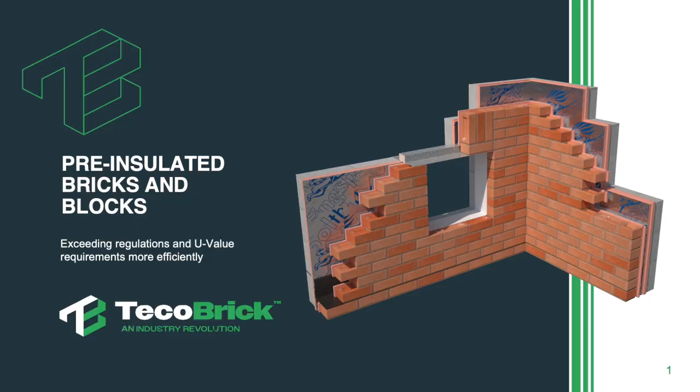So, who are Tecobrick? Tecobrick is an innovative, new construction company. Founded by Terry Wilcox, we are focused on product solutions that deliver high-performance, regulation-compliant constructions whilst maximizing labor and material efficiencies.

Our cavity wall products can be custom designed to meet your specific project requirements in terms of performance and aesthetics. Tecobrick is in partnership with Kingspan, the world's leading insulation manufacturer. Our systems use Kingspan Kooltherm K108, ensuring efficient cavity wall solutions across the board.

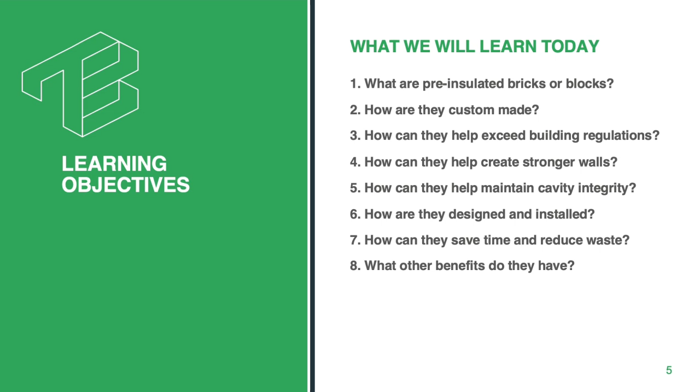Here are our learning objectives for today: What are pre-insulated bricks or blocks? How are they custom-made? How can they help exceed building regulations? How can they help create stronger walls? How can they help maintain cavity integrity? How are they designed and installed? How can they save time and reduce waste, and what other benefits do they have?

Insulation is precision cut to fit the brick or block exactly, and rebated on all four sides to ensure a seamless interlock with units above, below, and to the sides. This maintains insulation integrity and U values throughout.

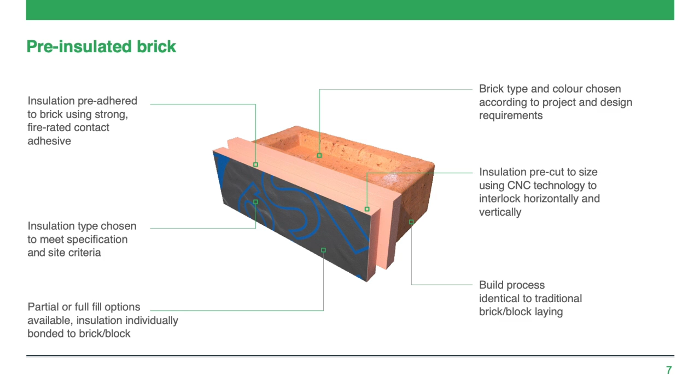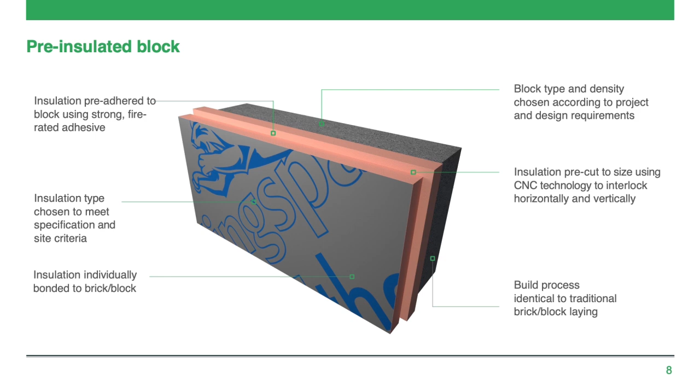Brick type and color can again be specified to suit the project. As we will see, these benefits are complemented by the fact that all installation is the same as for normal bricks or blocks. As with brick units, a range of block types and insulation thicknesses can be chosen to suit performance requirements. Partial fill or full fill cavities are easily achievable.

Let's take a look at how this particular cavity wall system has been designed to suit the house builder's needs. The system is available on a range of brick types, textures, and colors. This includes clay bricks, facing bricks, common bricks, engineering bricks, fire bricks, and concrete bricks.

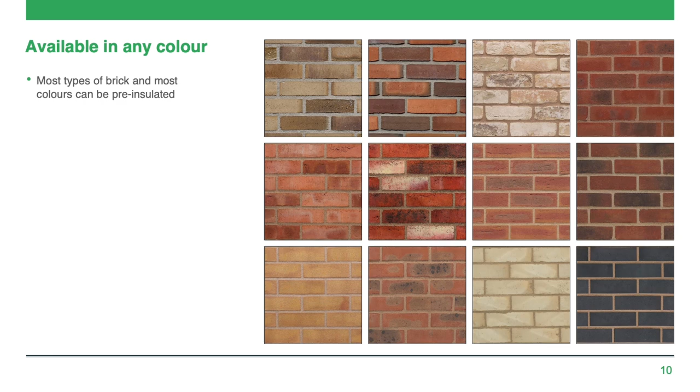Brick insulation thickness can vary from 30 to 40 mm, depending on whether you require a partial fill or fully filled system. Block types can be anything from thermalite blocks to concrete blocks, medium or high density. Insulation thicknesses can range from 50 to 60 mm, dependent on whether a partial or fully filled system is to be installed.

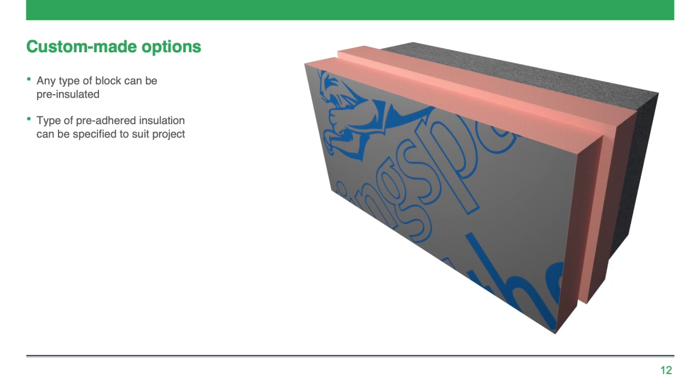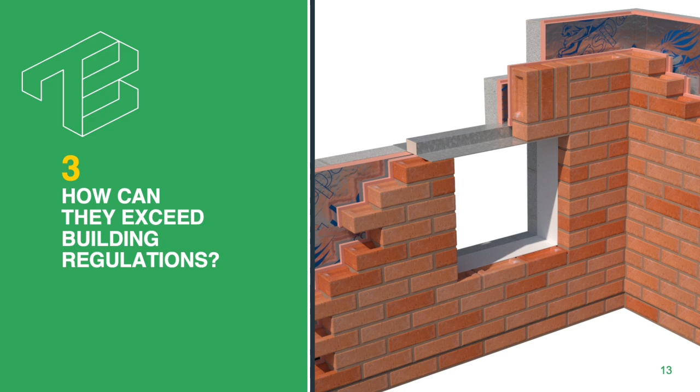Now we'll look at how these pre-insulated units can help exceed building regulations and U-value requirements. Please note that this system has been independently tested by Elmhurst Energy, a UK domestic energy assessor, DEA. Tecobrick is currently being assessed for certification by the BBA, and approval is expected in the coming months. Full reports are available for download at the end of this presentation.

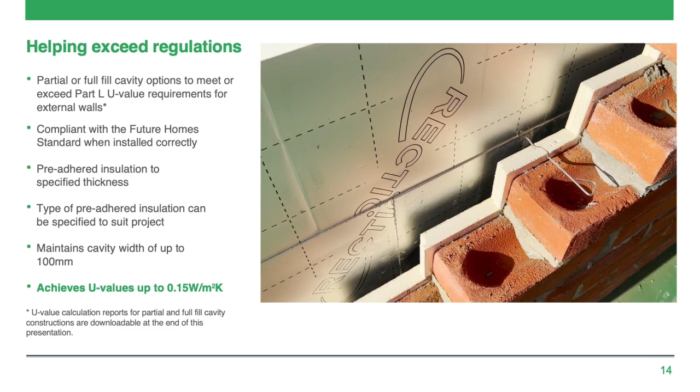Insulation thicknesses can be selected to best suit project requirements, achieving U values of up to 0.15 W per square meter K. Full fill or partial fill cavities can be easily achieved. Precision cut, pre-adhered insulation guarantees accurate cavity widths and ensures clear cavities. U-value calculation reports can be downloaded at the end of this presentation.

Insulation shown in this clip is for illustration purposes only. Tecobrick systems now exclusively use Kingspan Kooltherm K108 insulation.

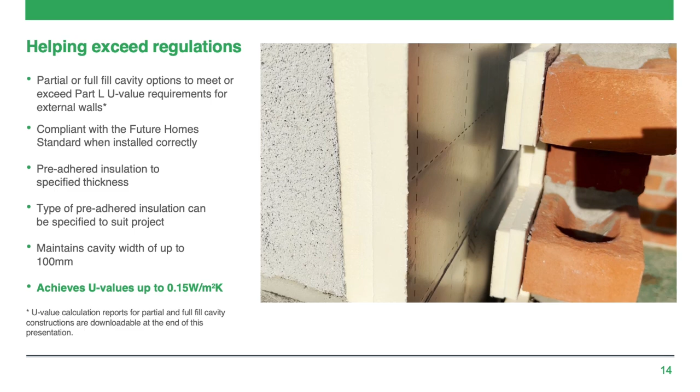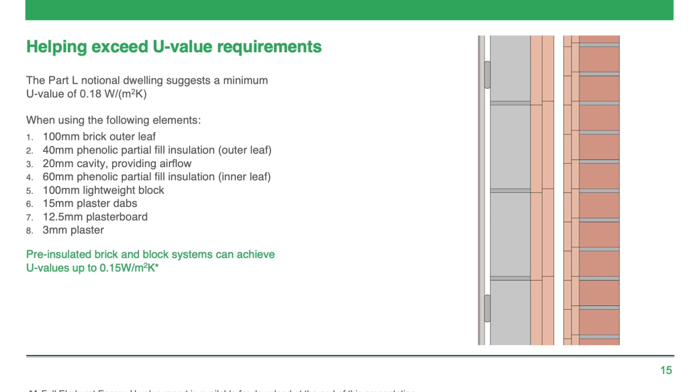This slide shows a section through a typical partial fill cavity wall. Independent testing shows that the pre-insulated brick and block systems can achieve U values of 0.15 Wm2K, exceeding the Part L requirements of 0.18 Wm2K. A copy of the independent report is available for download at the end of this presentation.

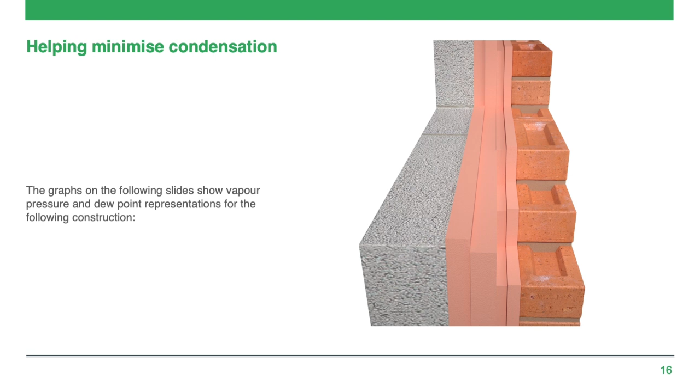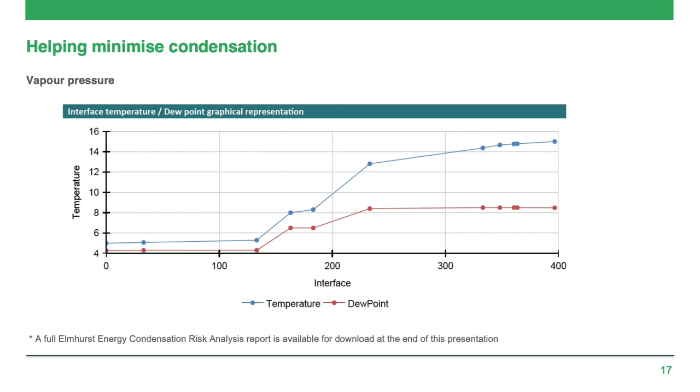As we can see, the temperature in blue remains above the dew point level at all times, ensuring that the dew point, and therefore condensation, is not triggered within the cavity. This slide shows the graph for a fully filled cavity. This means that cold spots are eliminated, and that the cavity wall is 100% damp and waterproof top to toe.

Clean, clear cavities maintain thermal performance and help ensure fire safety. Condensation risk analyses for partial and full fill cavity constructions are downloadable at the end of this presentation.

The insulation used in this system has a Euro class rating of F, under System 4 AVCP. Please note that there are potential restrictions placed upon this product which vary dependent on building type, height, construction and location. The adhesive is EN.

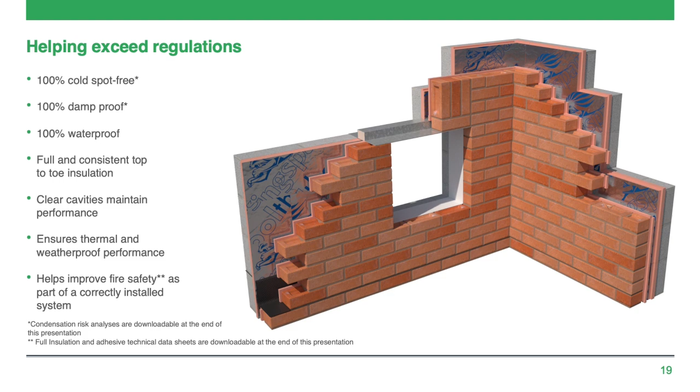13501 A2 S1D0 fire rated and is UK and EU IMO approved. Full technical data sheets covering the insulation and adhesive used in this system are also downloadable at the end of this presentation.

Traditionally insulated cavities can become clogged with mortar, loose insulation, and other debris. This can compromise their performance, allowing damp to transfer through internally and increasing fire risk.

Tecobricks and blocks help prevent these problems from arising and maintain performance. Cavity barriers should be provided as follows.

At the edges of cavities, including around openings, for instance windows and doors, where the cavity abuts compartment walls and floors, and to break up extensive cavities which could act as a route for fire spread.

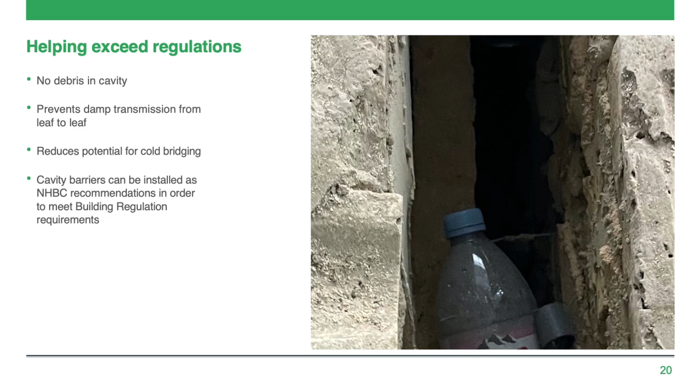Cavity barriers need to achieve a minimum of 30 minutes integrity, E30, and 15 minutes insulation, I15. The precision-cut nature of the pre-adhered insulation allows clean and accurate rebating on all four edges of each unit.

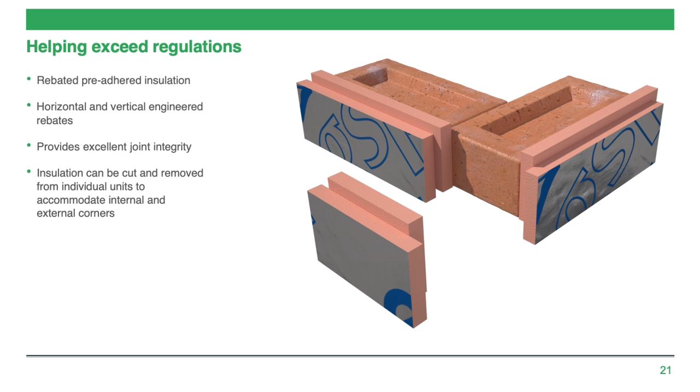As units are built up, using traditional tools and methods, excellent joint integrity provides seamless insulation. Where necessary, for example when constructing internal or external corners, insulation can be partly cut and removed from bricks or blocks to achieve the appropriate detailing.

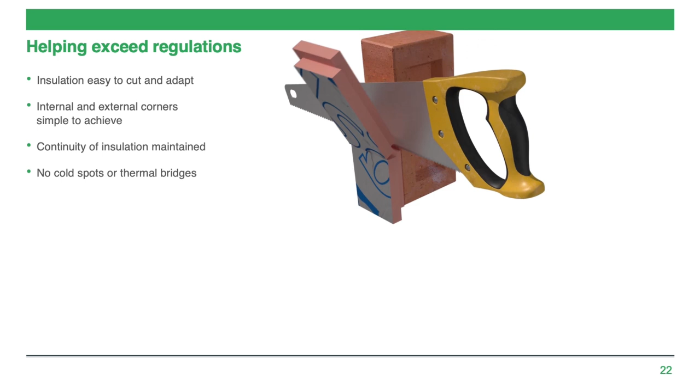To achieve the appropriate detailing, this ensures the seamless continuity of insulation and maintains performance.

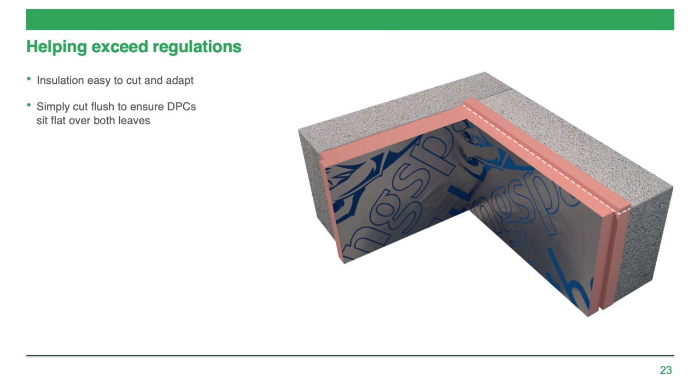Where needed, in DPCs for instance, rebated elements can be simply removed as appropriate to ensure the DPC lays flat over a flush surface. Additional rebated insulation offcuts can be supplied as required on a project-by-project basis.

We have seen how thermal performance is achieved and maintained, and how condensation can be minimized. Now let's look at strength and structure.

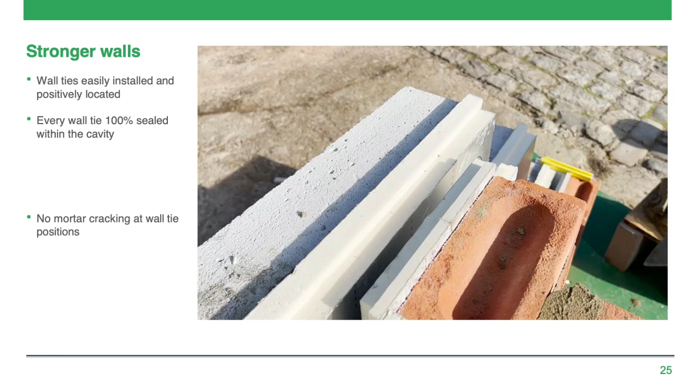As we can see, wall ties are very straightforward to install, and every tie is 100% sealed within the cavity. Because of the unique nature of pre-insulated bricks and blocks, there is no mortar cracking at wall tie positions.

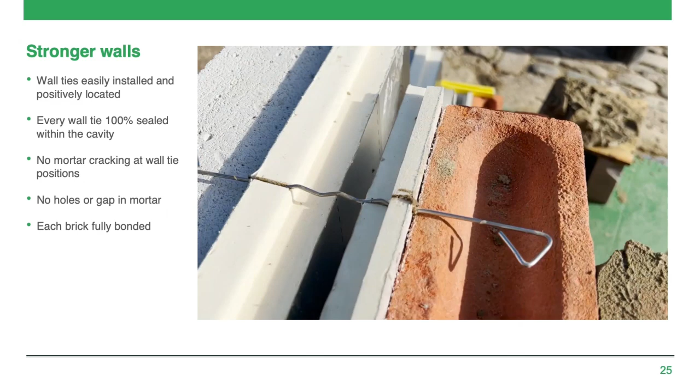No holes or gaps in the mortar, and each unit is fully bonded, ensuring a completely sealed wall tie. Insulation shown in this clip is for illustration purposes only.

Tecobrick systems now exclusively use Kingspan Kooltherm K108 insulation. Cavity integrity is critical to the performance of a cavity wall. With pre-insulated units, cavity integrity is easily maintained.

The top rebate on each pre-insulated unit acts as a mortar retaining upstand and leaves the perfect bed and joint when laid course by course. No mortar snots fall into and clog up the cavity, and less mortar is required than traditional systems.

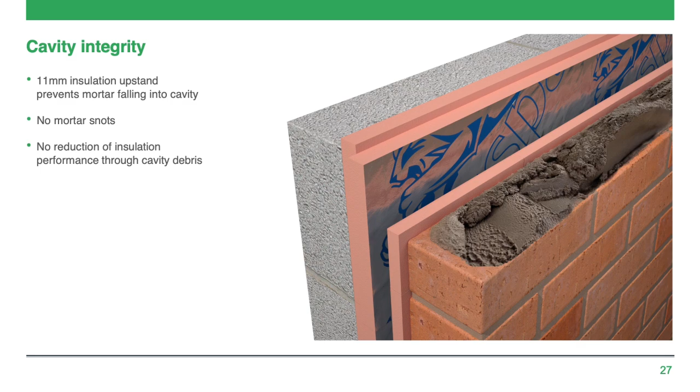This also ensures better airflow through the cavity and clear, blockage-free weep holes. This in turn ensures more efficient removal of damp air and maintains performance.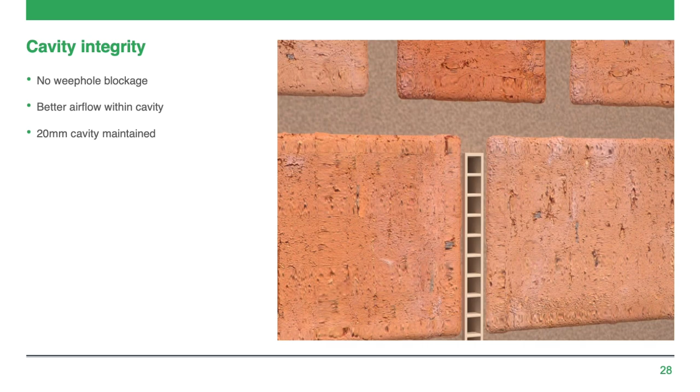How is typical design detailing tackled? The answer is no differently to traditional brick and block work. No special tools are required and no new skills needed.

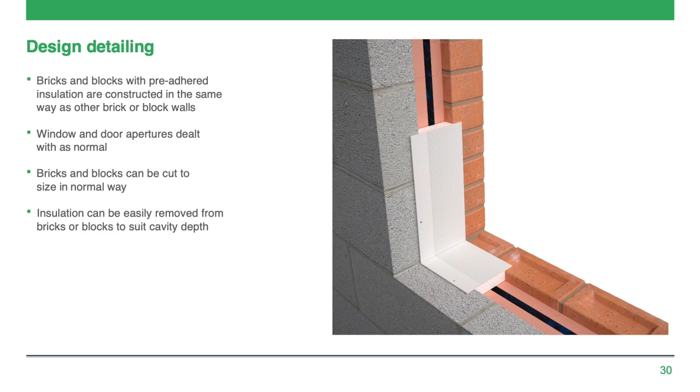Bricks and blocks can be cut to size in the normal way and insulation removed accordingly. Both systems, whether partial or fully filled, do not require an increase in cavity size.

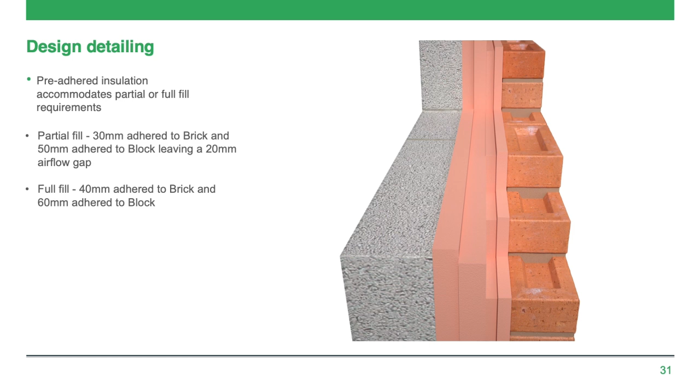This means there can be a 100 mm cavity, giving you more space on your plot, whilst still outperforming a 150 mm traditional cavity. Damp-proof courses are installed as normal, by simply removing the top insulation rebate on the appropriate brick and block courses.

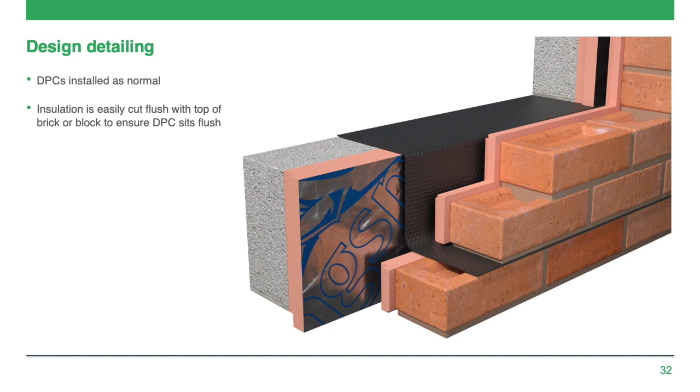The DPC can then sit perfectly level and flush. Vertical or horizontal cavity barriers can be simply incorporated into Tecobrick systems by the removal of an appropriately positioned channel of pre-adhered insulation on both brick and block leaves.

The cavity barrier then sits flush against both brick and block to form the required barrier. Soldier courses can be laid in the same way as for normal brick construction.

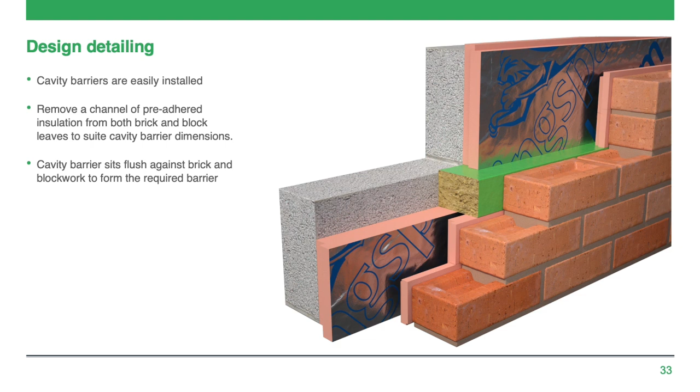There's no need to adapt any insulation, as Tecobrick's interlocking system works with both horizontally and vertically installed bricks or blocks together. When installing bricks or blocks over lintels, the insulation can easily be cut and adapted to suit as normal.

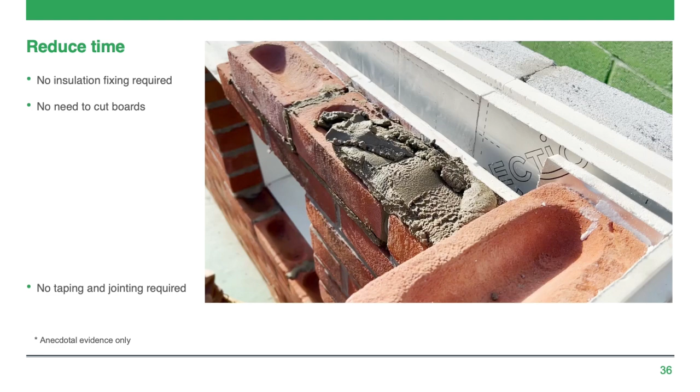How can pre-insulated bricks and blocks save time on site and reduce waste? These pre-insulated units maximize on-site efficiency by eliminating the need for fixing insulation, cutting boards, taping or jointing.

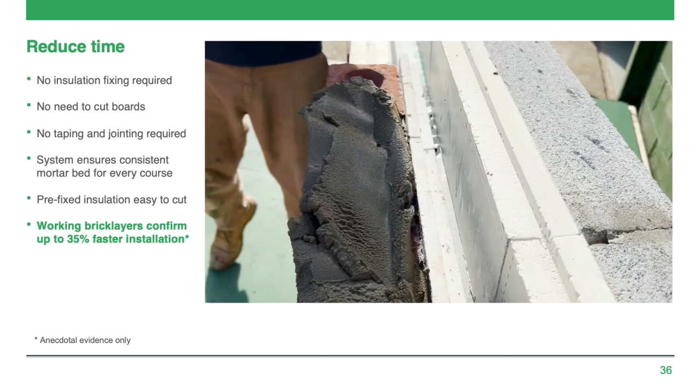The system also ensures accurate and consistent mortar beds on every course. If required, you're also able to erect both skins of the cavity together, rather than one at a time, as with traditional cavity walls.

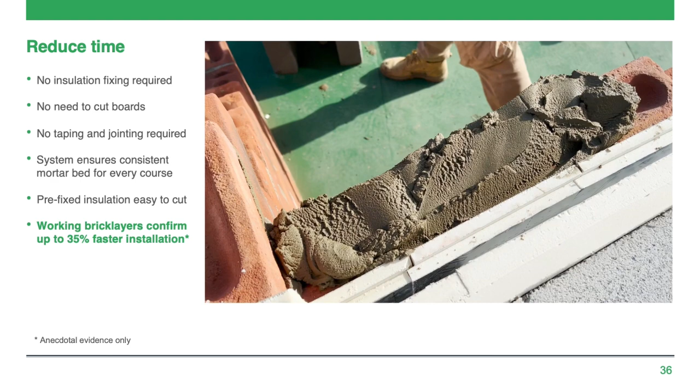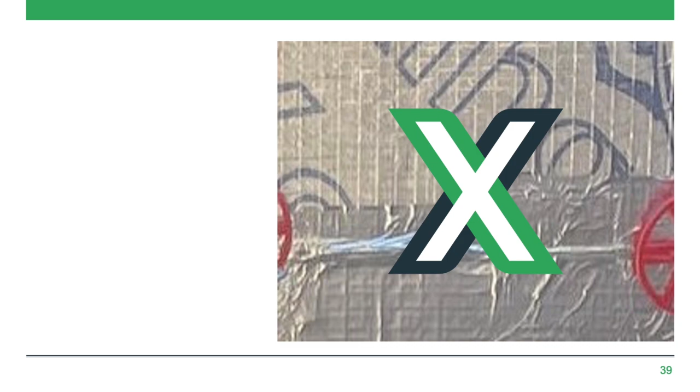Tecobrick systems now exclusively use Kingspan Cooltherm K108 insulation. No insulation fixings are required. There is no need to cut boards, and no taping and jointing of any boards. The 11mm upstand ensures consistent mortar beds and minimizes wastage.

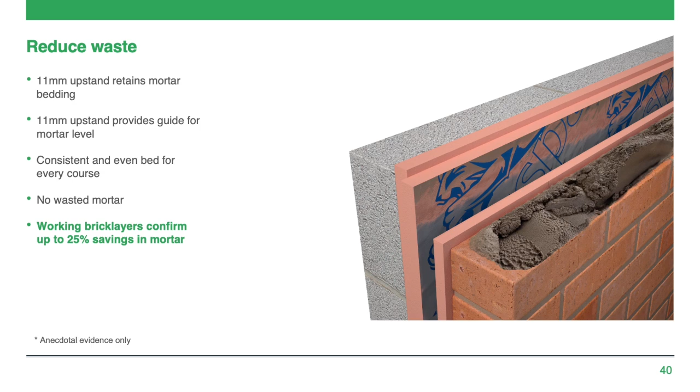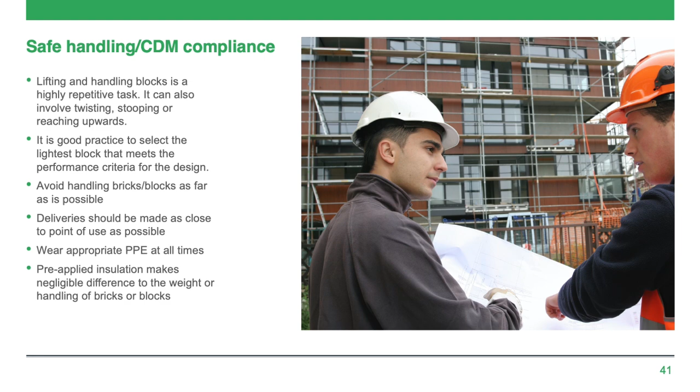Working bricklayers anecdotally confirm delivery of up to 25% savings in mortar. Tecobrick can reduce delivery requirements and the volumes of mortar required for construction, compared with traditional methods, by up to 25%.

All construction projects above £300,000 undertaken in England are required by law to have a site waste management plan. Always refer to the HSE guidance on waste management and try to use materials which can be recycled. Materials that are pre-engineered and assembled, like pre-insulated bricks, can help minimize wastage.

A whole-life thinking or whole-life carbon approach considers all the carbon emissions produced over the entire life cycle of a building, not only the operational energy and embodied carbon, but the building's afterlife too - the carbon cost of its disposal as well as its construction.

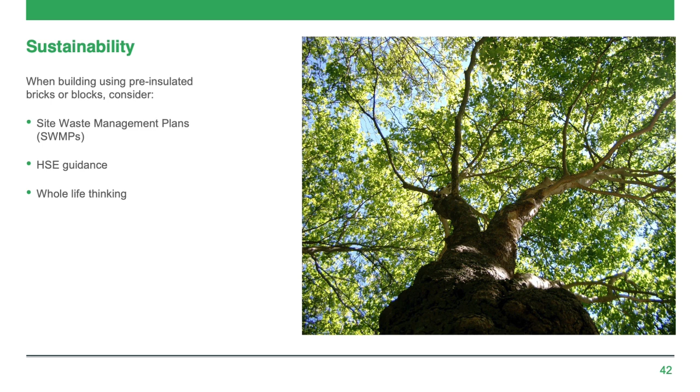A rigorous WLC assessment will take into account all of the following: raw material extraction and supply, transport of raw materials to where they will become building products, manufacturing of building products, transport to site, the construction process and disposal of waste, use of the building during its lifetime, and end of the building and its disposal - demolition, deconstruction or reuse.

Tecobrick is comprised of 3 key elements. Let's go through an overview of their sustainability, one by one. Firstly, the outer leaf: bricks. These can be any kind of brick the customer requires, as long as they are approved.

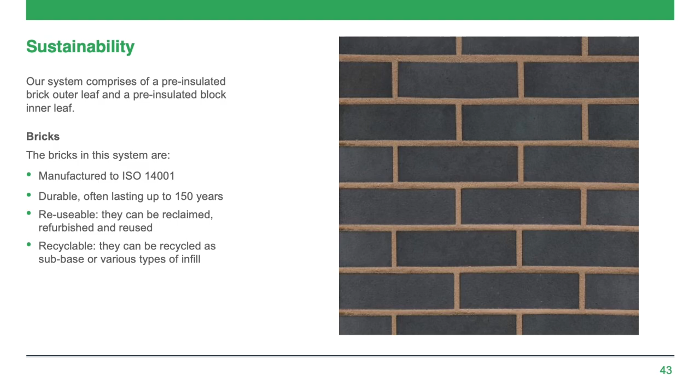The bricks in this system are manufactured to ISO 14001. Durable, often lasting up to 150 years. Reusable - they can be reclaimed, refurbished and reused. Recyclable - they can be recycled as sub-base or various types of infill.

Now, insulation. The insulation in this system is Kingspan K108 cavity board, manufactured to ISO 14001. It can be removed from brick or block at end of life or prior to recycling, and is covered by an EPD, downloadable at the end of this presentation. Please note that there are potential restrictions placed upon this product which vary, dependent on building type, height, construction and location.

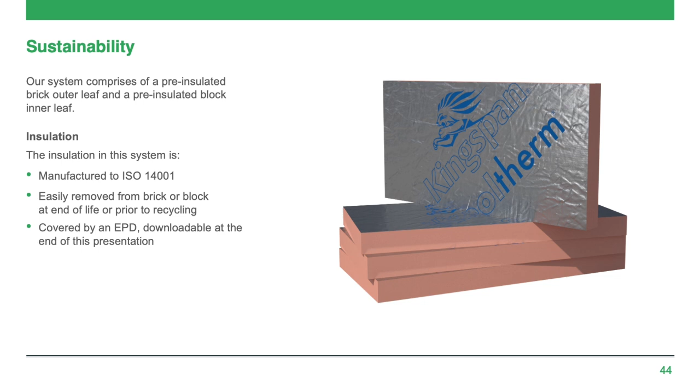And lastly, the inner leaf: blockwork. Tecobrick blocks can be of any type approved for the construction in hand. The blocks in this system are manufactured to ISO 14001, with up to 80% recycled content, including reused waste pulverized fuel ash (PFA), and are recyclable at end of life.

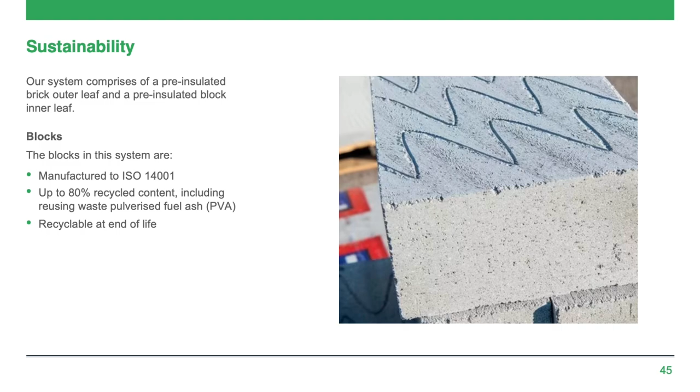What further benefits do pre-insulated bricks and blocks offer? Lower physical volumes mean fewer site deliveries and less storage space required on site. Less mortar is used. Installation is more efficient and faster, whilst providing higher U values with 100mm full fill cavities, saving 50mm interior space on each wall.

Masonry walls are generally considered to be low maintenance, but good practice will periodically require the following: ensuring that masonry remains weatherproof, repairing any cracks or deterioration of joints, cleaning of any efflorescence, staining or mold, and if necessary, sealing the surface.

Correctly installed cavity insulation should last and perform for the lifetime of the building. The ability of pre-insulated bricks and blocks to ensure clean, moisture-free, clear cavities helps to enhance the construction's durability and long-term performance.

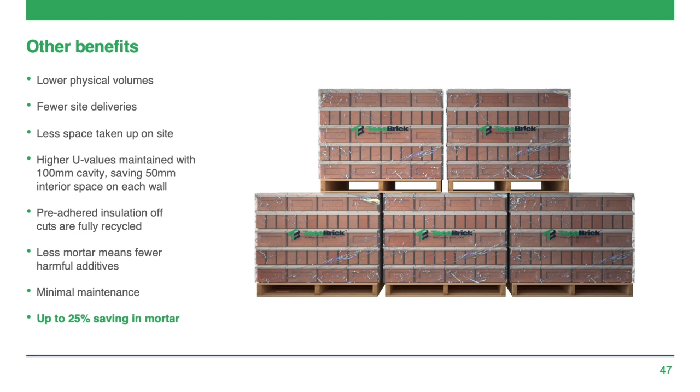So finally, let's review what we've learnt about Tecobrick bricks and blocks. We have learnt: 1. What pre-insulated brick and blocks are. 2. That they can be custom-made. 3. That they can help exceed building regulations whilst increasing internal usable space. 4. That they can help create stronger walls. 5. That they help maintain cavity integrity. 6. That design and installation is straightforward. 7. That they save time and reduce waste. 8. That they have further environmental and space-saving benefits.